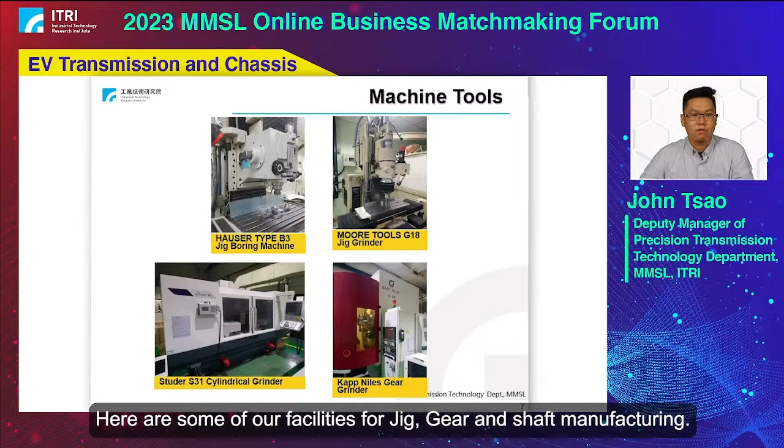And we have a factory in our campus. Here are some of our facilities for jig, gear, and shaft manufacturing, like our Kapp Niles gear grinder and Studer S31 cylindrical grinders.

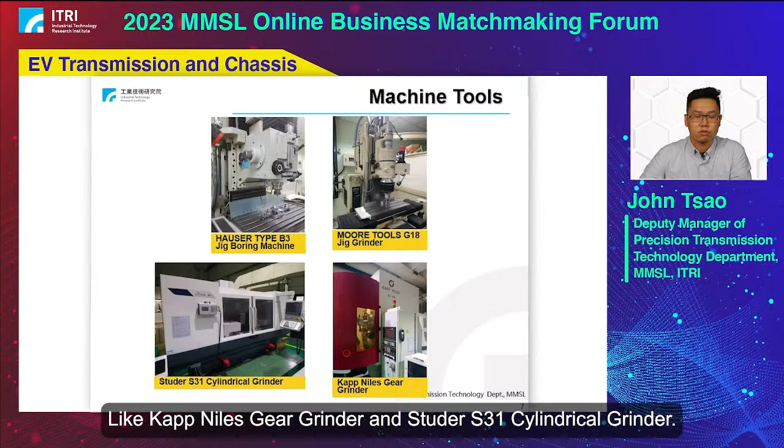Also, for the gear manufacturing process research, we have a heat treatment factory in our campus to test the heat treatment process for our transmission gears and shafts.

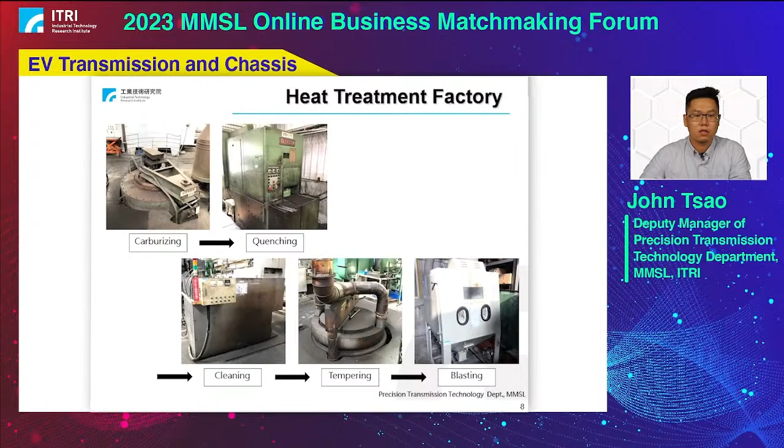And for the NVH test equipment, we have the gear measurement and the 3D dimension examination lab, also some NVH equipment.

And for our transmission products, for EV transmission, the first one is a 2-speed automated EV gearbox. It could apply to a 140 kilowatt peak power traction motor.

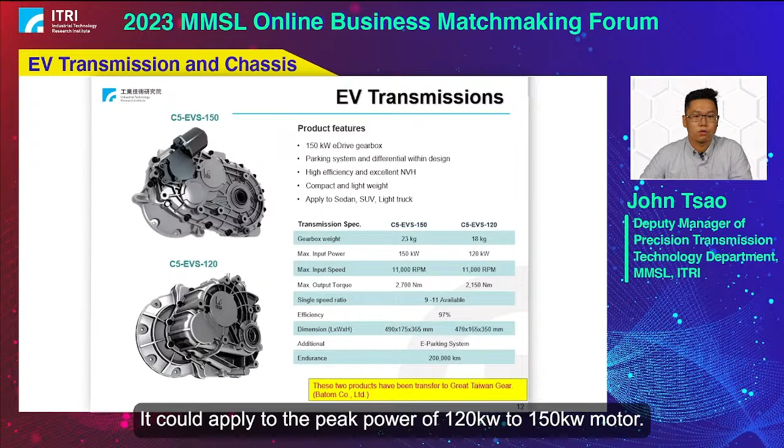Another EV transmission product is the single-speed EV gearbox, and we have 4 models for a single-speed system. It could apply to the peak power 120 kilowatt to 150 kilowatt motor. These two are for the 120 kilowatt, with single gear ratio from 3 to 8.

And especially for the last model, it's a single output shaft and could be suitable for a small truck with a rear drive system.

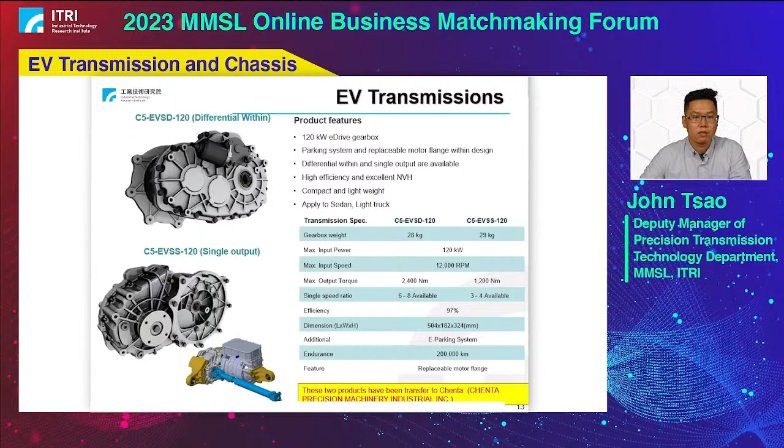And for the e-bus and heavy-duty vehicle, we have an integrated planetary gearbox that combines the gearbox and traction motor. It could apply to a 220 kilowatt peak power motor.

And for the industry reducers, for the RV cycloid reducer, we have two models now, and rated torque ranges from 245 to 784 Newton meter.

And for the chassis development, first one is our electric commercial vehicle chassis, and it could apply to a 3.5 tons commercial EV with wheelbase 3,300 millimeter. Also, it's a rear drive system with a single-speed electric powertrain.

In this project, we have done the design and prototypes for the powertrain, frame, steering, brake, also control, suspension, and its battery and transmission systems.

And the other chassis project is for a 12 tons and wheelbase 3,300 millimeter heavy-duty vehicle. It's a diesel engine powered system with 4-wheel drive transmission system.

And in this case, the development includes the frame, brakes, and steering, also the cooling, suspension, powertrain, and the transmission, also the fueling system.

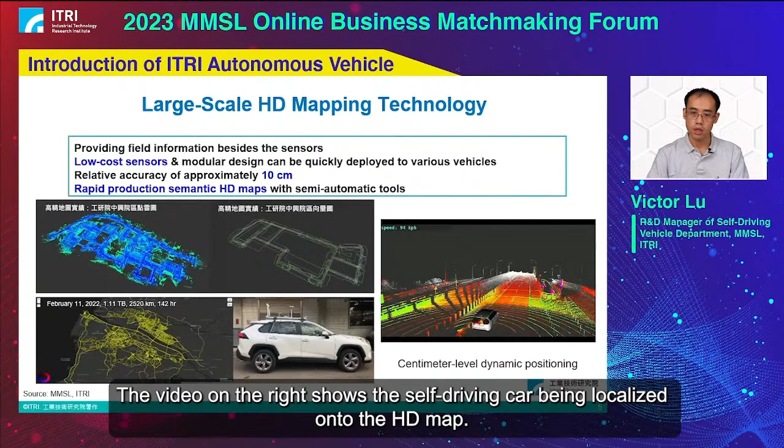We provide tools that allow us to create these HD maps at scale. On this slide, you can see examples of HD maps created using our tools. Immediately below the text is the point cloud map and vector map of the ITRI campus, and the bottom left image shows the scale achievable by our mapping tools. In the middle, we have mounted on a car the mapping sensors of this low-cost mapping toolkit that we built. On the right, this video shows the self-driving car being localized onto the HD map.

The perception module is responsible for taking all these real-time sensor streams, combining them, analyzing them, and in real time forming an understanding of its environment. This includes knowing the location and speed of surrounding cars, pedestrians, even scooters. Let me play this video. This perception system is able to know about the location and speed of surrounding objects. It's also responsible for analyzing the image, finding traffic lights, and correctly determining the state of the traffic lights.

In addition to these sensors for sensing the vehicle's surroundings, we can also augment these senses with information from farther away. Roadside units with cameras from farther away, or even around a building corner, can share their view through wireless communication with the vehicle. This further expands the field of view that the vehicle has, so it could be more safe and perform more performant driving.

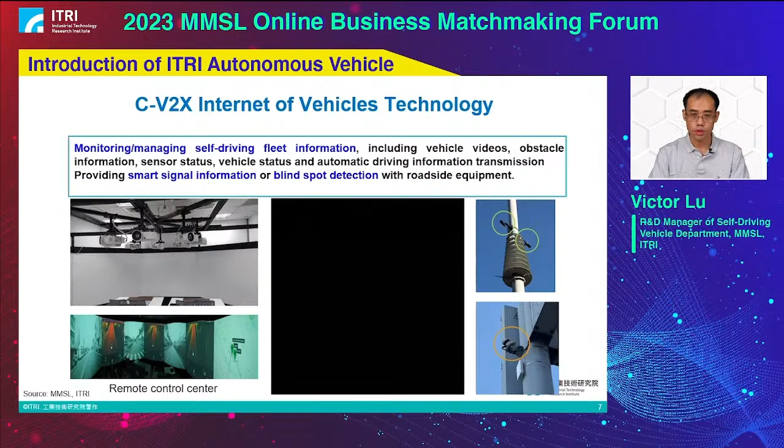Our technology stack includes software to support this kind of connected V2X communication. In this video, you see the car's real-time information being collected and aggregated, and its status being monitored from a control center in the cloud. The top view is the car, inside the car, and the bottom view is what is seen from the control center. So we can see where the car is, and we can monitor various statuses of the car.

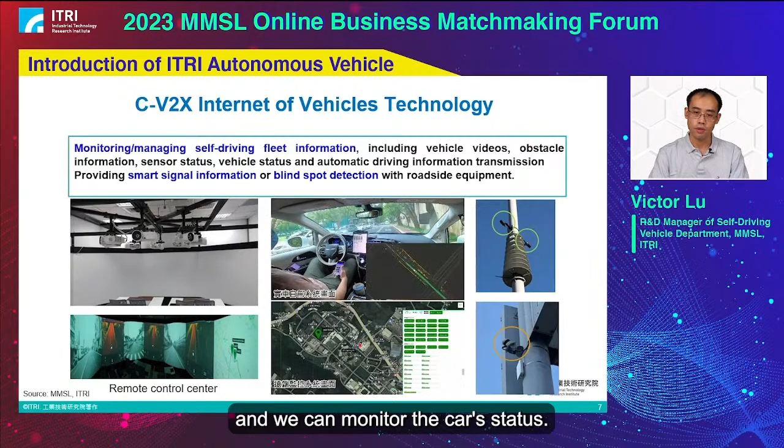Safety is probably the most important requirement of self-driving cars, so we place a lot of emphasis on it. We adopt a lot of safety standards, including SOTIF and ISO 26262. In addition, we develop a collection of simulation tools that allow us to simulate and test the functionality of our subsystems prior to actual deployment in the real world.

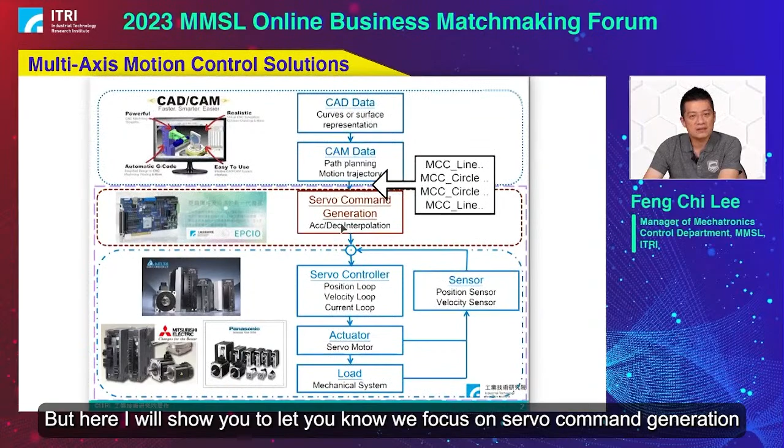Someone may ask what the controller is — maybe the purple block. It's about the controller, the servo command generation, the servo motor, and the servo driver. Here I want to show you that we focus on servo command generation.

At Taiwan ITRI, we provide research and development of motion control ASIC with the actual ASIC. After that, we also provide a motion control card — it may be 4-axis or 6-axis, with a PCI or PCIe interface.

You can use it in the PC base, or you can just stand alone. But only the standalone solution, we also provide IMP610S. And in recent years around the world, in digital control, or you can also call this digital servo, it's more and more popular in the industry.

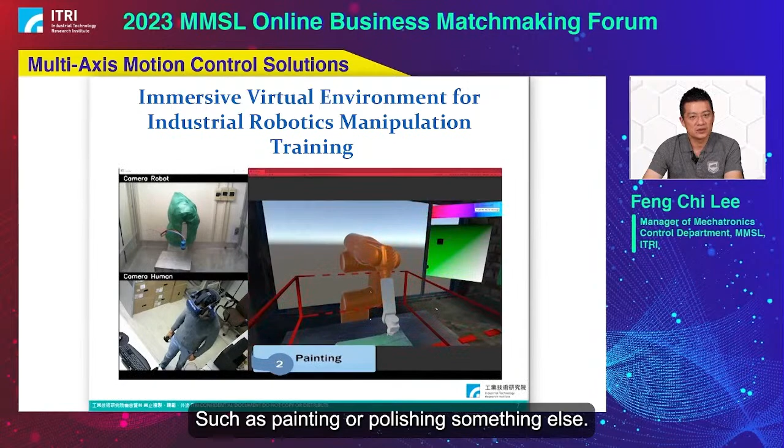Traditionally you don't need coding, but for a software engineer it's not easy to finish. Most importantly, you can avoid very dangerous and hard environments, like painting, polishing, and other tasks. This project integrates virtual reality. If you have any questions, you can contact me.

The next example: this project integrates robot control using our EMPS kernel, combined with machine vision to separate different kinds of garbage. The environment isn't very clear, so we integrate the robot with machine vision to solve this problem.

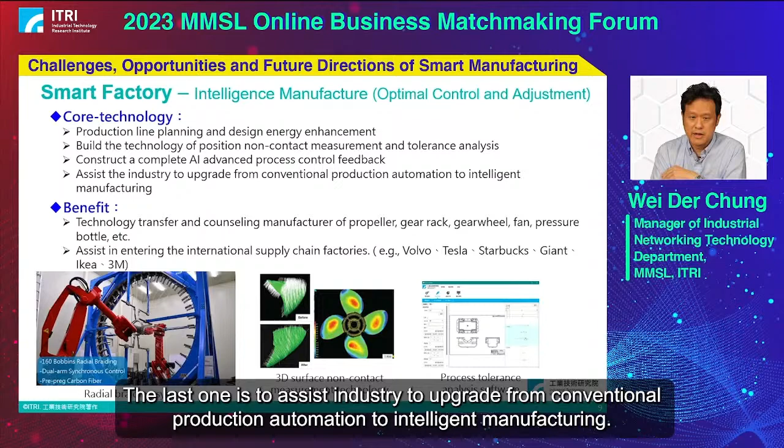I think with these technologies, our main focus is to improve material efficiency and energy efficiency. In that way, we can achieve low carbon manufacturing and make factories smarter.

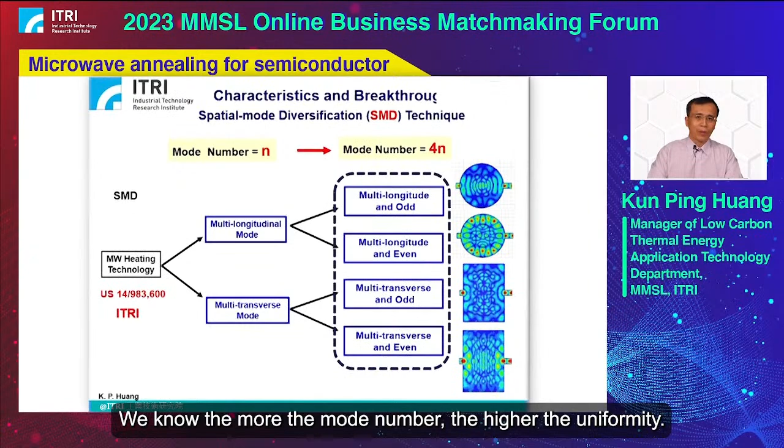So we use the longitudinal and the transverse mode to increase the mode number. We also use the even and odd mode to increase the mode number. So in such kind of technology, we increase 4 times the mode number. We know the more mode number, the higher uniformity we'll get.

So my next technology, I will talk about the time phase coupling technology. How do we increase the mode number in the power supply? In microwave transmitter, we use the half wave rectified power supply of a transmitter. So if we enlarge the capacitor, it will make the overlapped coupling microwave. Such kind of technology can increase 2 times the mode number.

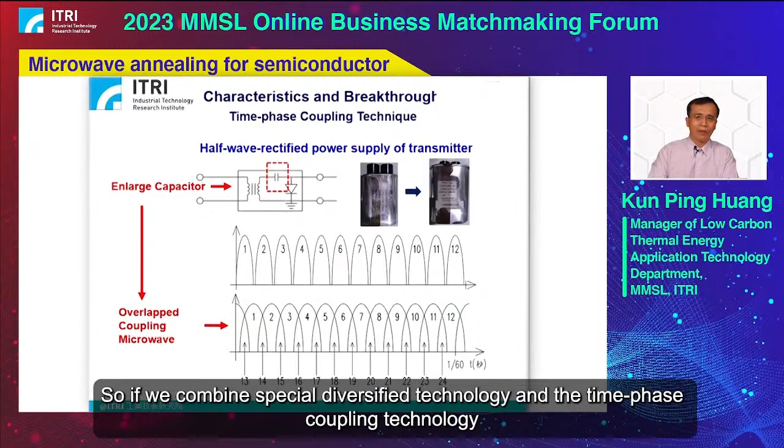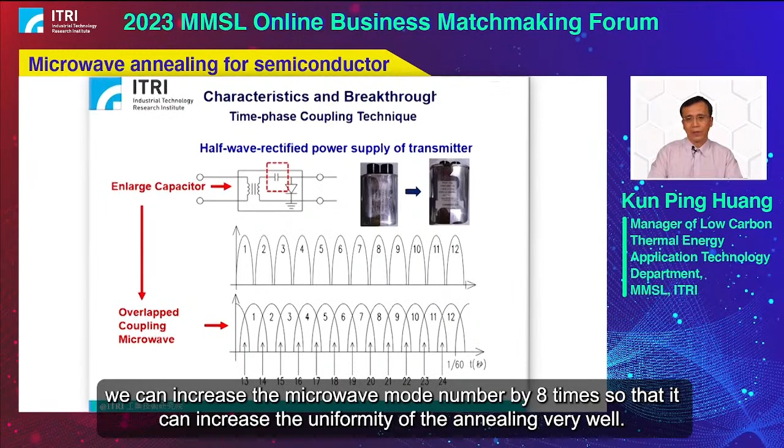So if we combine the spatial diversified technology and the time phase coupling technology, we can increase 8 times the microwave mode number. So it can increase the uniformity of annealing very well.

Currently now the MOS structure is progressed into the gate all around structure. So if we continue to use the RTA annealing technology, it will make the dopant diffusion.

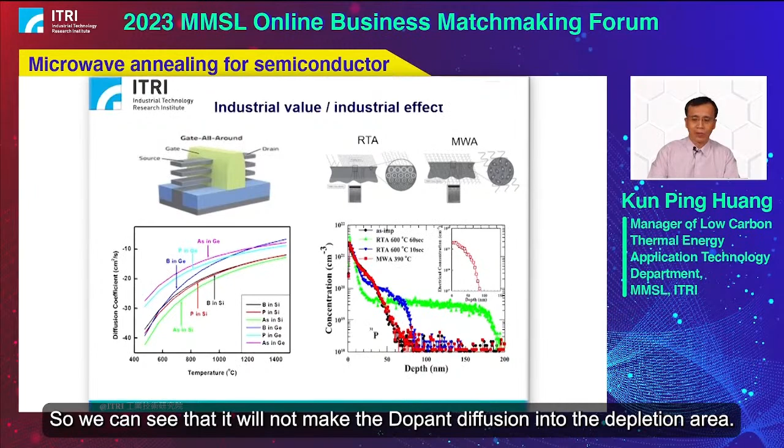But if we use the microwave annealing, the annealing temperature is only 390 degrees C, so we can see it will not make the dopant diffusion into the depletion area. So it can guarantee the device is good.

This slide I will talk about and show the coupling microwave mode advantage. If we do not use the coupling microwave mode, the uniformity of microwave annealing is only 4.1%. But if we use the coupling microwave mode, the uniformity will go down to 0.5%.

In semiconductor, the uniformity we can only accept is 1%. In our microwave annealing technology, the uniformity is only 0.5%. So our microwave annealing process can get good uniformity, which can meet the semiconductor industry criteria.

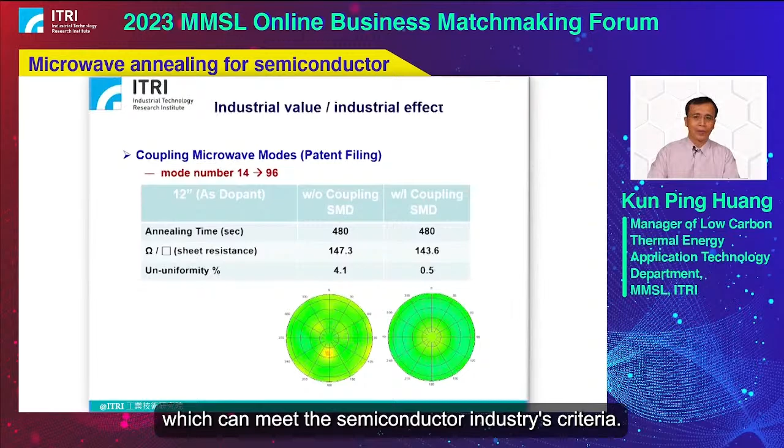In this slide, I will talk about the consumable cost. Compared to other companies, our microwave annealing system can save around 85.6% for the consumable cost. So it really can save the cost to maintain the microwave annealing system.

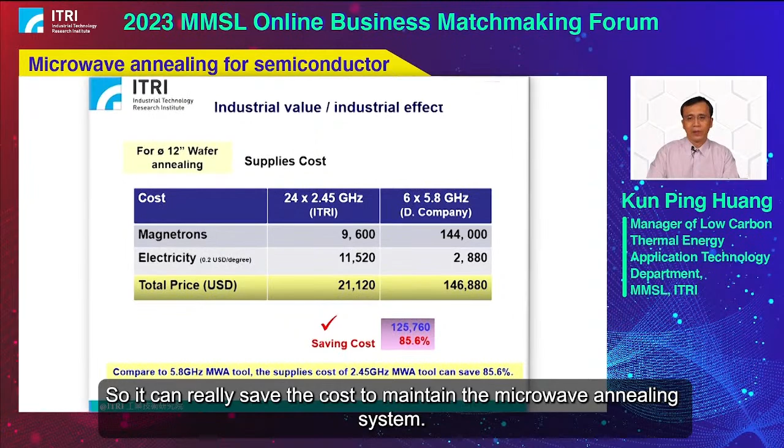In the final part, I will talk about future development and application potential. The first is for chemical synthesis. Because some chemicals can absorb the microwave energy, it can save the energy and the process time to synthesize a new chemical.

And then second, for powder metallurgy, because in the future the metal part will get smaller and smaller, it also can use microwave to do the metallurgy. And third, for carbon fiber, because carbon can absorb the microwave energy very well, we also can use the microwave to do carbon fiber synthesis.

And then for the solar cell, it's also because the silicon and the CIGS, their chemical bonding can also absorb the microwave energy, so it can decrease the annealing temperature for their crystallization.

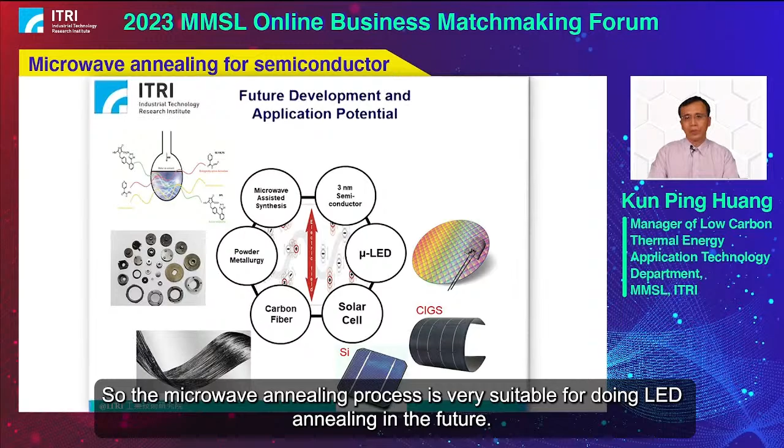And for LED, especially for micro LED, it needs the lower annealing temperature. So the microwave annealing process is very suitable to do the LED annealing in the future.

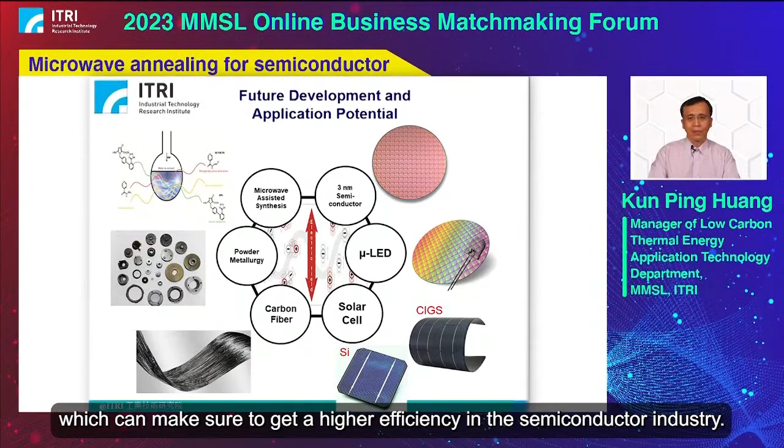And of course, the silicon semiconductor, because silicon absorbs energy very well, it can use microwave annealing to do the device annealing, which can make sure it can get higher efficiency in the semiconductor industry. That's all. Thank you.

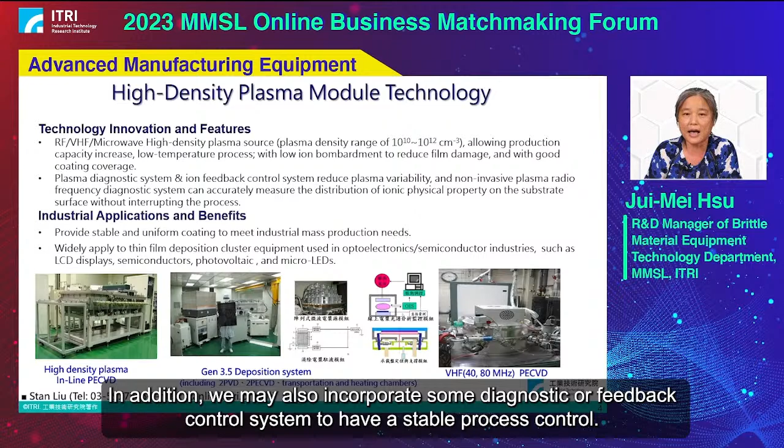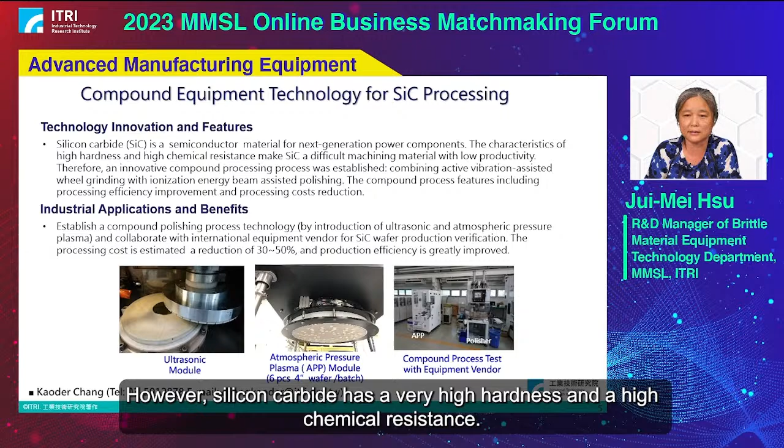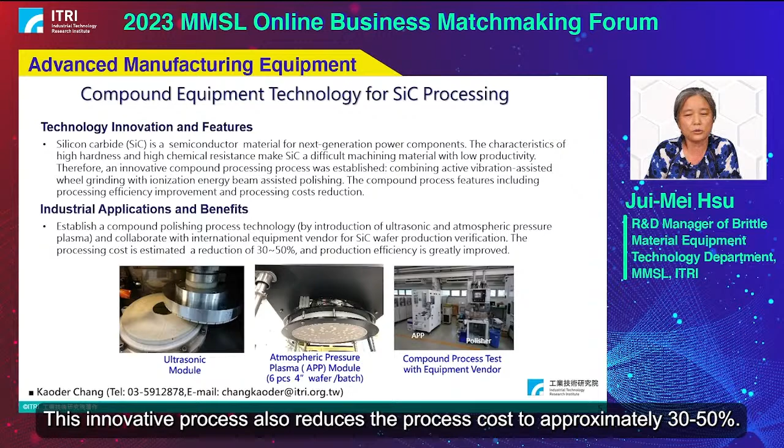Silicon carbide is a key material for next generation power components. However, silicon carbide has very high hardness and high chemical resistance, which makes it a very difficult material to machine or polish. ITRI has developed a process that combines ultrasonic grinding and plasma-assisted polishing technology. We can improve the production efficiency for silicon carbide wafer production, and this innovative process also reduces the process cost by approximately 30 to 50%.

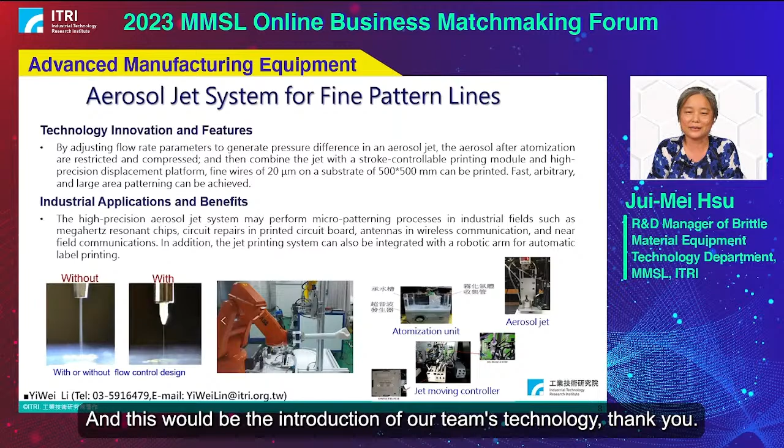And that would be the introduction for our team's technology. Thank you.

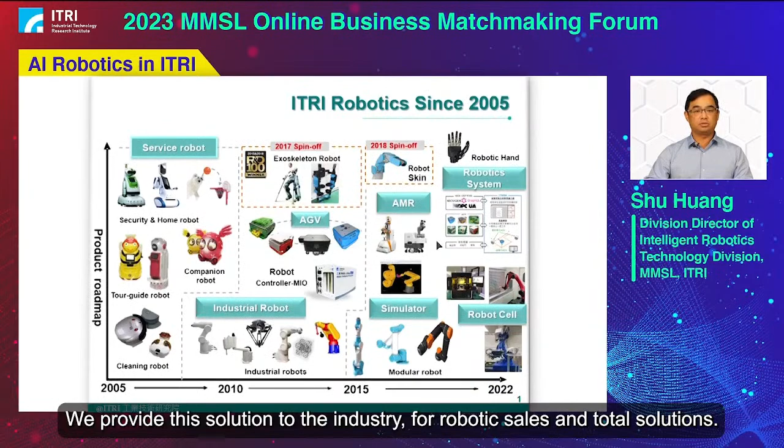We use an all-digitized interface for our controllers. With the help of EtherCAT, the sampling rate can be up to 1 kHz. Optional modules include accuracy improvement modules and hand-eye coordination modules.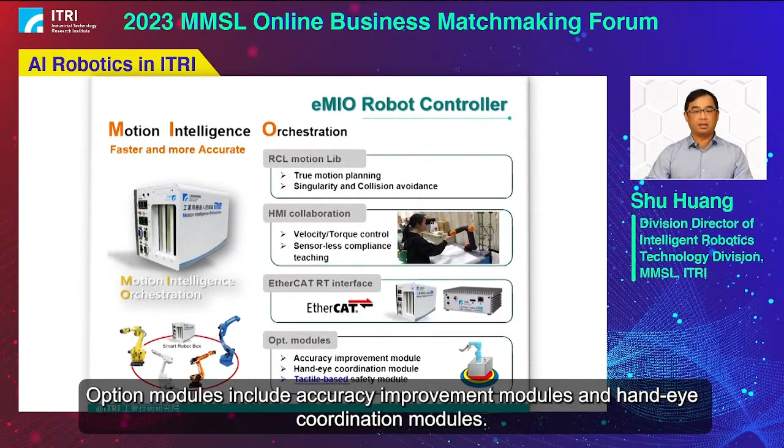CPS robotics is the trend for current use. CPS stands for Cyber Physical System. Our embedded controllers handle the physical part of robot control, together with equipment and sensors, while our simulator, EasySim, handles the cyber part. We have a CAD offline editor and robot planning for trajectory simulation.

We combine these cyber and physical parts for different kinds of applications, including grinding, polishing, welding, spraying, and painting.

One example of our CPS robotics is the Vision Guided Robot, VGR. Our simulator simulates the 3D objects and can recognize objects from the environment. We call this example random bin picking. Our simulator has multi-view angle capabilities to reduce blind spots, and our AI algorithm can determine the best grasping point for robots.

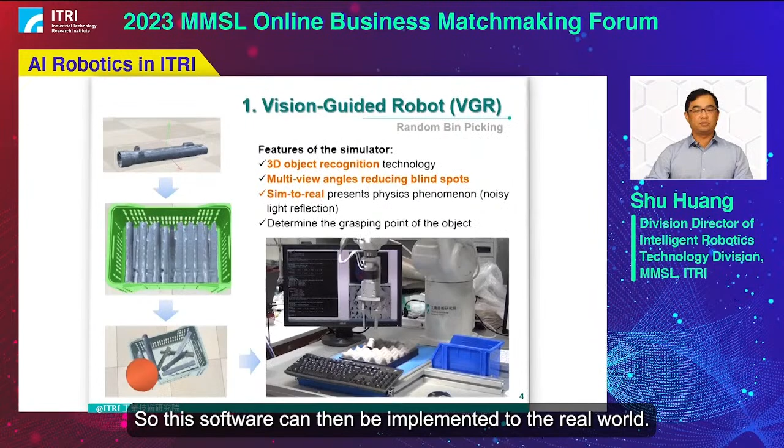This software can then be implemented in the real world. So our robot, with the camera, can pick up the workpiece from a piled set of objects, as shown in the videos below.

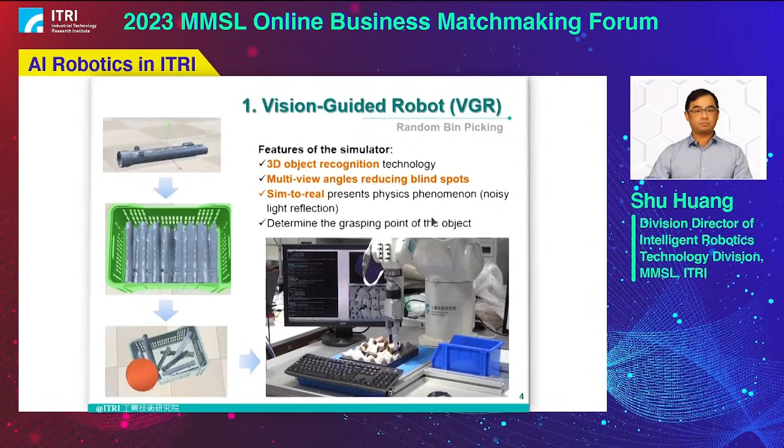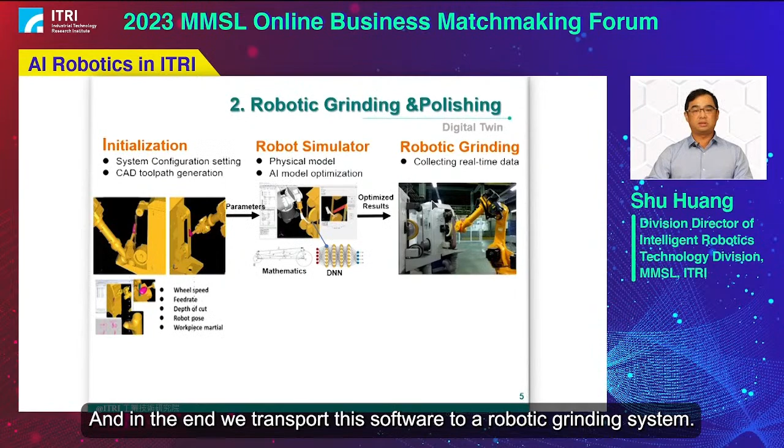Another example of CPS robots is a robotics grinding and polishing system. In the initialization stage, we import the CAD model of the object, along with the CAD model of robots and devices. Our simulator can then optimize and simulate the physical model with AI optimization algorithms.

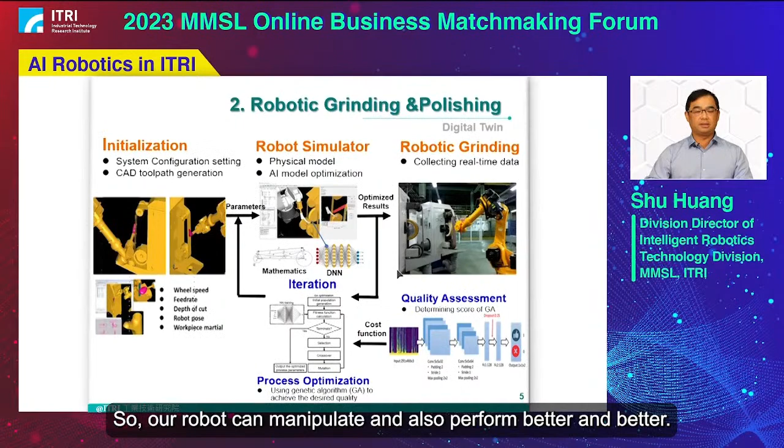So here we optimize the position of the robot and the trajectory of the working movements, then transport this software to a robotic grinding system. Meanwhile, we collect real-time data, giving us a quality assessment feedback loop and an iteration process to improve the grinding robot's quality, so our robot can manipulate and perform better and better.

Here we introduce our AMR, Autonomous Mobile Robot. This robot consists of a mobile platform together with a manipulator on top, and our navigation software handles navigation, mapping, and localization, allowing the robot to move around in the working places. We have multi-spot navigation algorithms and station parking navigation algorithms.

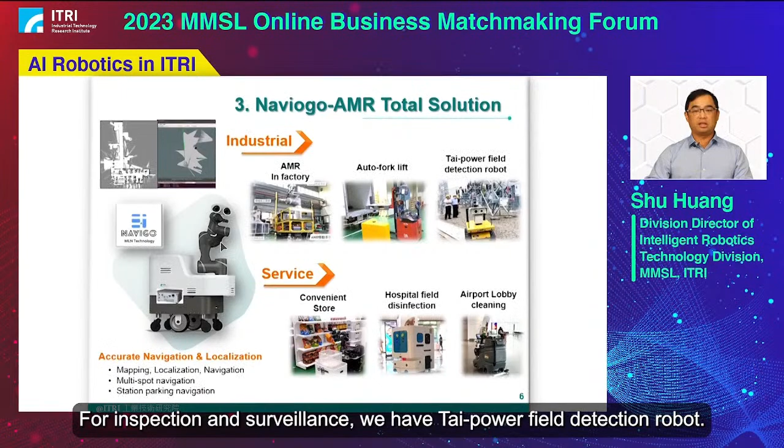This AMR can be applied in both industrial applications as well as service applications. For industrial use, this AMR can transport workpieces in factories and can also be used as an auto forklift. For inspection and surveillance, we have a Tai-power field detection robot.

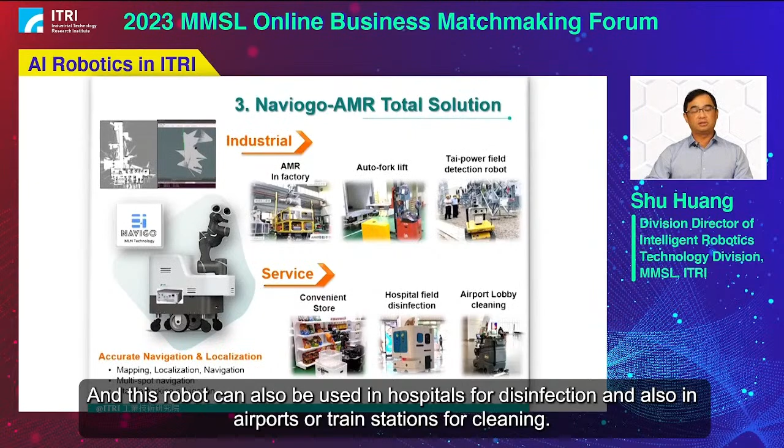Another part is the service part. In convenience stores, you can see an AMR moving around to pick and place goods. This robot can also be used in hospitals for disinfection, and in airports or train stations for cleaning.

We also extend our simulator to a bigger metaverse, what we call the robotics metaverse. We leverage the powerful computing power from NVIDIA, so our robot twin has the function of AI, omniverse realistic simulation, and SQL database.

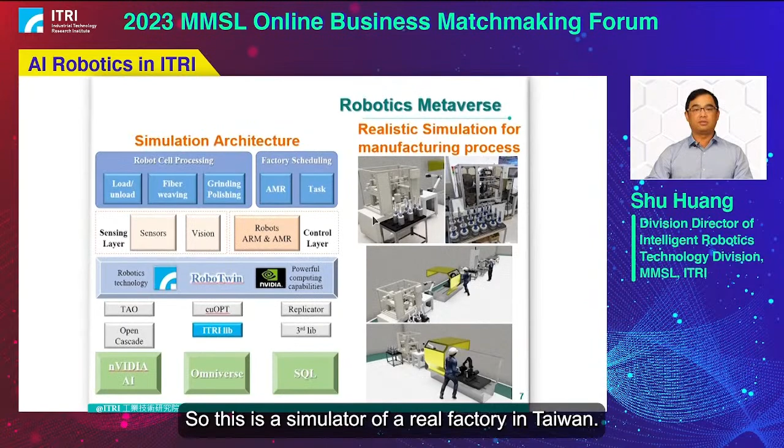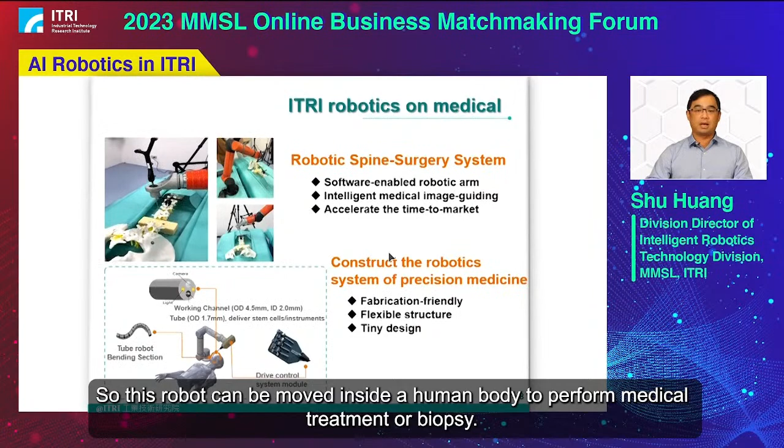Our ITRI Robotics handles the robotics issues in four aspects. For the thinking part, we have our robot controller and simulator to generate robot programming and trajectory. For the vision part, we have a vision-guided system to perform visual-guided or random bin-picking applications in factories. These robot cells are used for various tasks in the factory to reduce human labor and improve manufacturing quality.

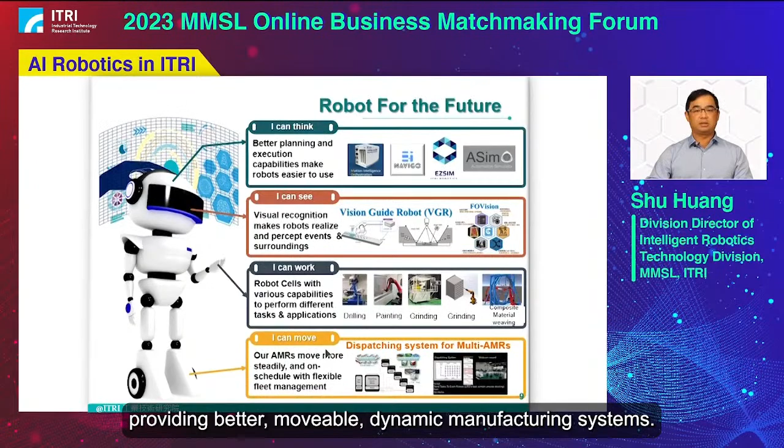And the last part, our AMR systems can be used in both industrial and service applications, providing a better, movable, dynamic manufacturing system. So that concludes my presentation today. Together we build a better future.